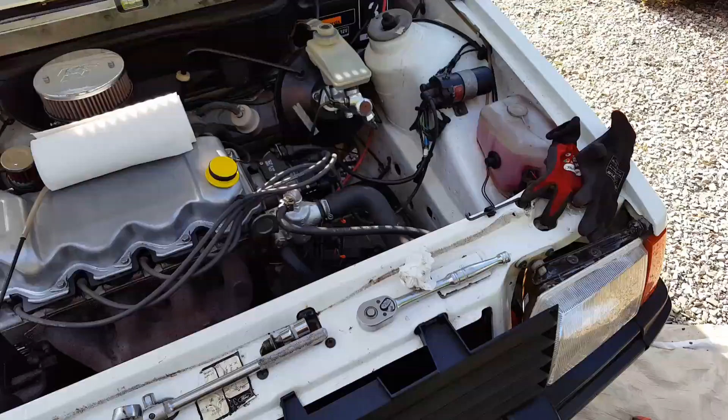Hello, Spring here. Right, going to change the gearbox oil on the Escort 1.6 CVH 1984 5-speed manual.

Just went out for a little day out, me and Tracy. Went up to Driffield Way, Bainton, up in Yorkshire, North Yorkshire. Drove beautifully, 105 miles round trip, absolutely spot on. She ran exceptionally well on the motorway. She likes 70, 80 miles an hour. Yeah, absolutely beautiful. Used hardly any fuel.

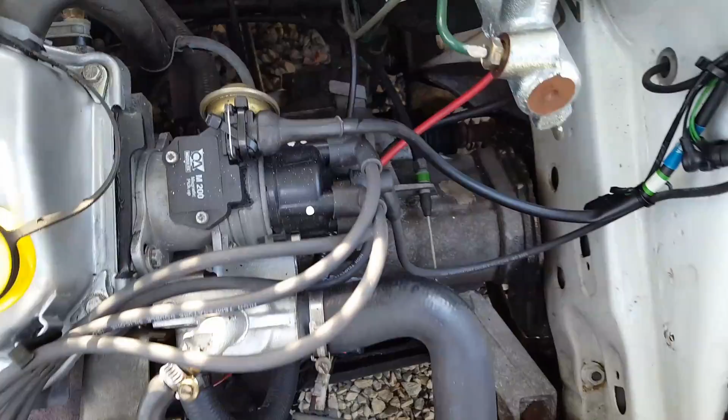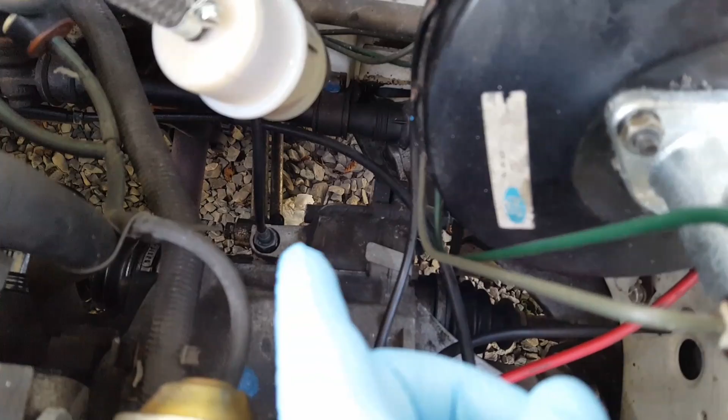Fantastic. So when I got back, because it's the longest trip she's done in a day, I thought I'd just have a little check round, look for any extra leaks. I found a little leak there on the speedo input to the gearbox, or output from the gearbox. Now that's been seeping since I got the car. For some strange reason I never actually checked it. I just assumed that the seal had gone. So it was seeping a tiny bit. And when I got back I checked it, and lo and behold, the collar was actually loose.

So I spun it back out, pulled out the outer cable, gave it a good clean up, put it back in. And what you have to do with this, I don't know if you can see from there, but on the cable itself, there's a squared off section. If you grip that with some pliers or a mole grip, and then you spin, the only thing I found to go on there was a 3/4 AF spanner, which was near enough. So you hold the centre steady and then do that up, and it's gone down nice and tight.

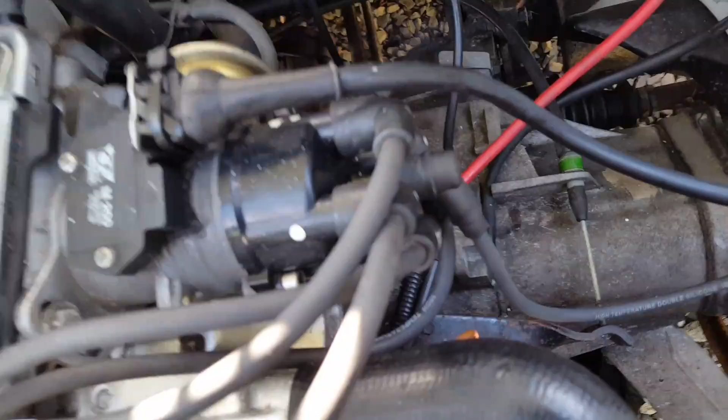So I've cleaned that up. We'll see if it actually leaks in the future. But yeah, I hadn't even thought to check to see if it was done up tight. I've had this a year now. And also the last person who tried to put it in hadn't held the cable part with pliers, because the whole thing was wound up. When I released that, it spun about 4 times back. So it's now as it should be. There goes the spanner in the drain box.

I found a tiny leak, which I can't show you from here, but there's 3 screws here that keep the 2 halves of the distributor together, and on the bottom screw there was just a tiny occasional drip, and it dripped onto the gearbox. So even though I changed this distributor, and I changed these bolts because they were a bit naff. This is a new distributor, but it's used, but it was newer than what came off. This is the Lucas modern conversion.

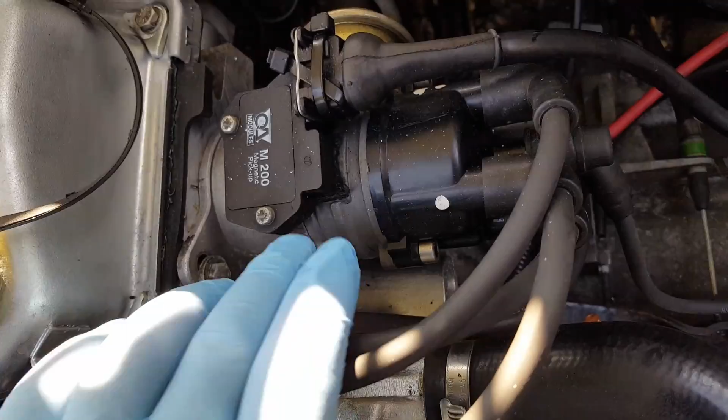Anyway, even though I went through it all, I obviously didn't do these 3 screws up nice and tight. I must have just assumed that because they held the 2 halves together and no one was going in there, that they'd be tight. So I did a little crank on all 3 of those, and that leak has stopped now, although it's not running. So we'll keep an eye on that.

They didn't feel like they wanted to really crank too much, so if it actually leaks again next time, I'll pull the distributor off, and I'll change the 3 of them. I shall just put little Allen bolts in with the nylock nut on the back. There's plenty of room. I shall do what I did to these, except these I didn't put a nut on.

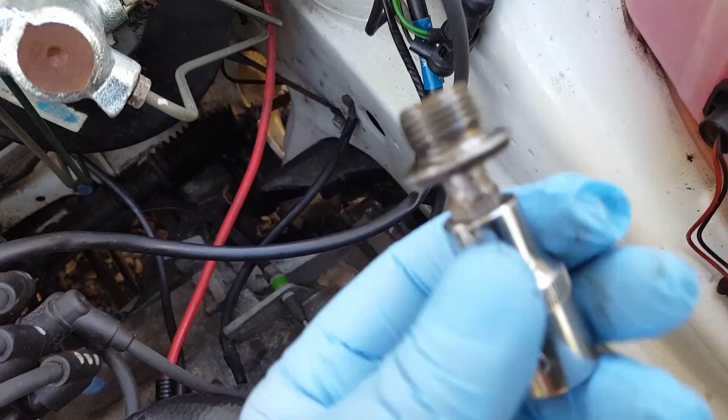So that's that. Anyway, then while I was looking at the gearbox, I thought, I haven't actually touched the gearbox oil in this since I've had it, and I've changed everything else, so it would make sense to check it. So I've been in the manual. That's where the filler plug was that I've taken out, which is on this particular box, a number 50 Torx.

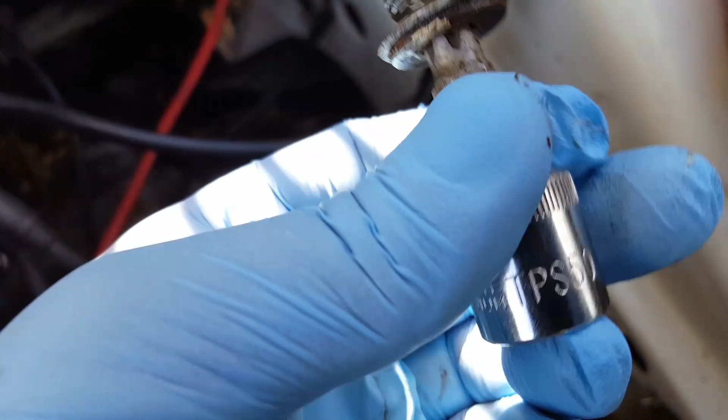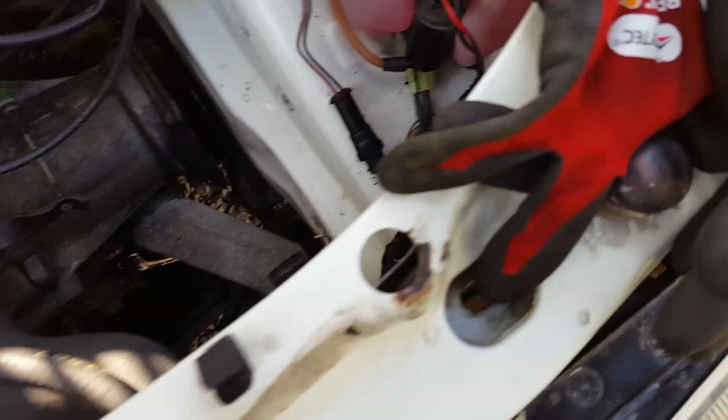Depending on the designation of the gearbox, the suffix letter on it, it can be an Allen key one, it can be a Torx one, all manner of things, and they don't tell you what size. So I managed to get that out. It wasn't too badly seized in. Just used one of these and that big spanner on the end of it for leverage, and it just cracked. Anyway, now in the manual, let's go down bottom, I'll show you. In the manual it says, like a lot of cars, particularly modern cars, bear with me while I get underneath.

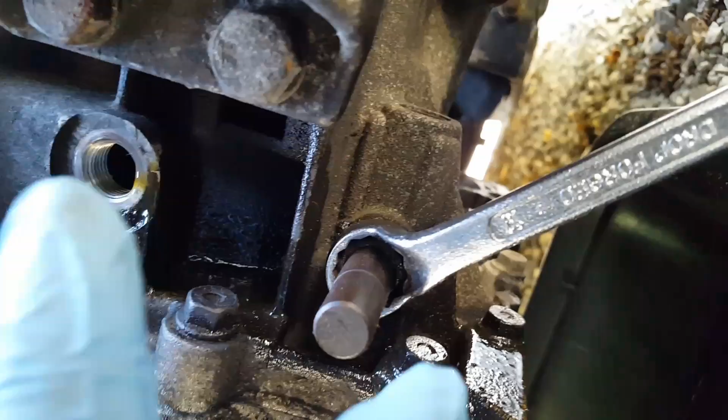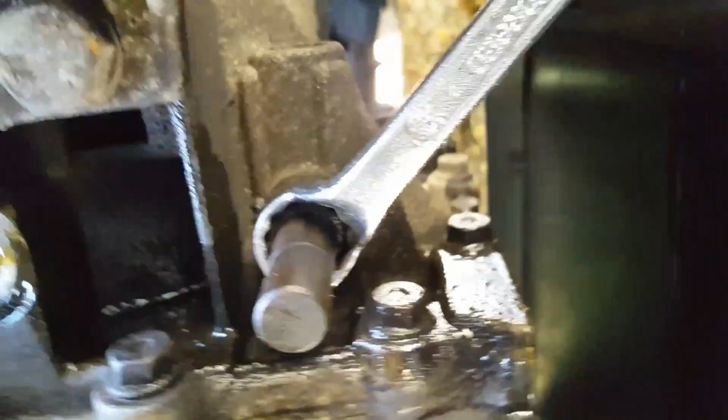All that oil, by the way, is just what pissed out of here because it was red hot when I undid it, and obviously the oil had expanded past the filler, so I'm just catching that. Anyway, in the manual it says don't change the gearbox oil, you don't need to, it's not a maintenance bit, just periodically check the level and top it up if necessary.

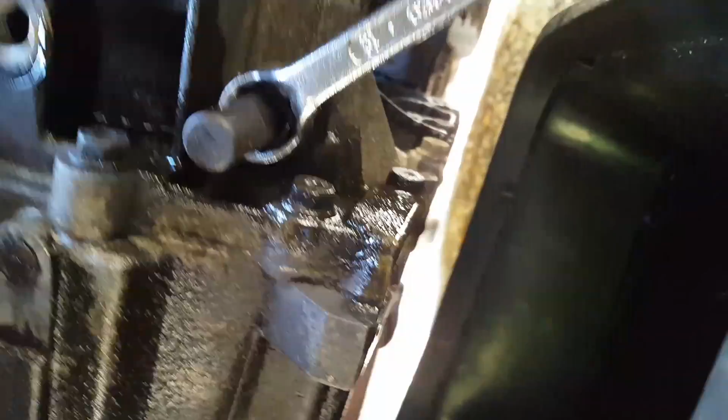Well, that's alright, but when your car's 33 years old, it can get a little bit stinky. So this stuff is rank and definitely due a change. So underneath in the manual where it says don't change the gearbox oil, just top it up, it then has a little paragraph that says if you do need to change the oil, i.e.

If you're taking a box out and you need to get inside there and you need to drain it, you need to take this one out, which I forget what it's called. It's something like a neutral lock. So in here apparently there's a spring and a pin, and I think it locks it in neutral if you're taking the box out. To be honest, I didn't even bother reading up on that, so it just says undo this, there'll be a spring in there and a pin, watch out. So I haven't undone this yet, and that's how you drain it, and then you can refill it.

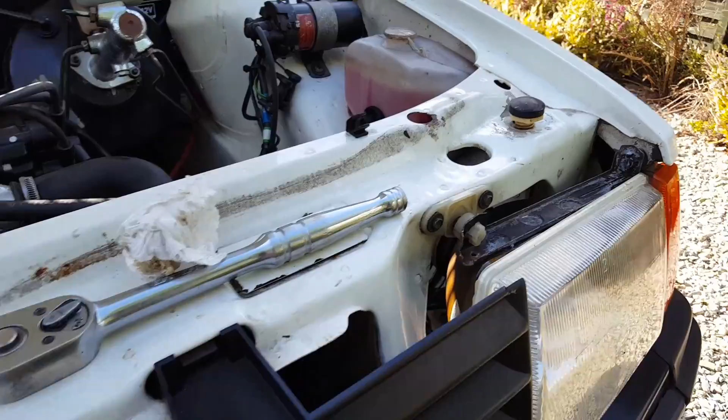So although don't change the oil, if you do have to change the oil, take that out, drain it, and then to measure the new oil, depending on where you look. Oh no, where's it gone? I've lost it. Right, capacity, anything between 2.8 and 3.1 litres, but it says, I've lost it, I made a tool to measure it and it's gone. I might have to pause a minute. Basically it said,

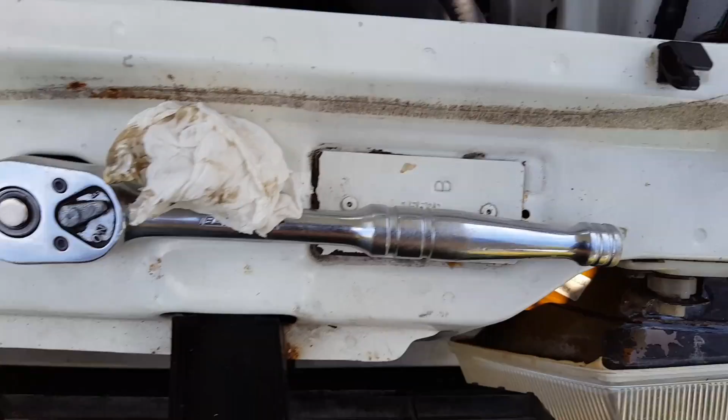depending on the gearbox, 5mm down from the filler hole. So it says bend yourself a bit of metal and mark off 5mm underneath the bottom of the hole. So I took an Allen key, chopped the end off it and put a mark 5mm down, and I appear to have dropped that somewhere. So I'm going to pause and find it. Yeah, as I thought, it was in the pan of oil.

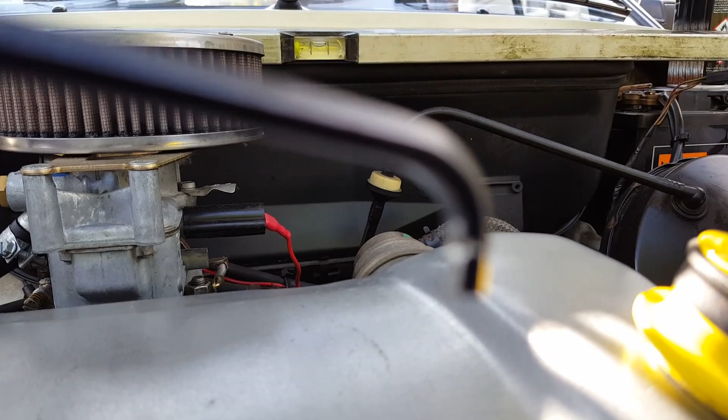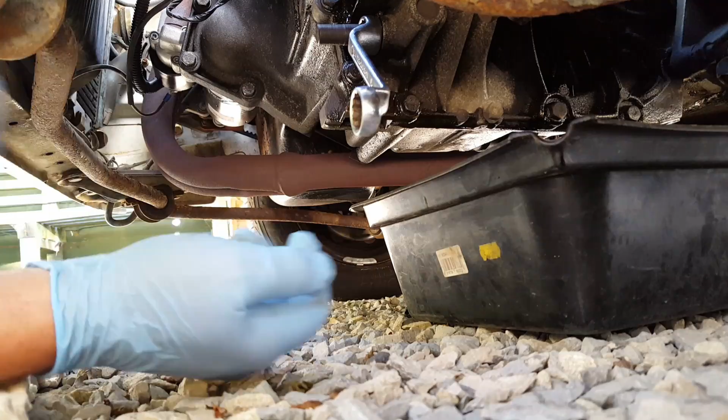Right, please focus. Basically, I took an Allen key, chopped the end off, and I've put a little notch in the end, like a dipstick, and that is 5mm from the flat, this flat part, not from the curve on the corner. Oh well, anyway, I want to get this bottom thing out and let it drain.

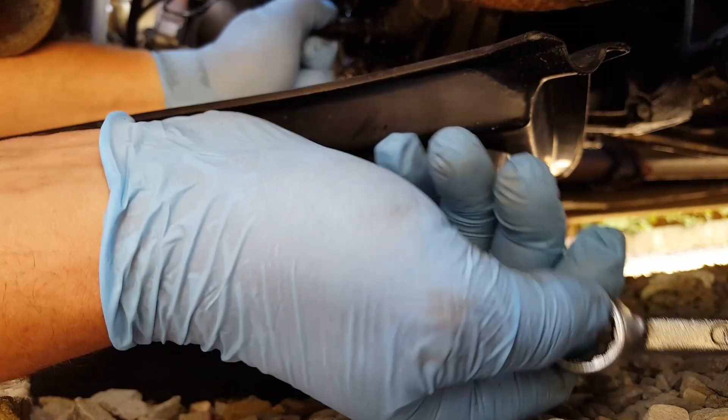Okay, well, I've just literally given that a little tap with the edge of the hammer and that's gone free. So we'll see how it goes. I'm sorry the drain bowl's in your way, but needs must. I'm trying to do it so you can see what I'm actually doing rather than me just doing it and then showing you afterwards. And apparently there's a spring and a clip or something, so this should be quite interesting. It's a 19mm, by the way.

Oh, and also it says when you're doing this, make sure the car's level. Well, I've got a big 1 metre spirit level and I've put it across the bonnet slam panel from 2 identical points. It's level that way, and I put it across the door sill and it's level that way, or near as damn it.

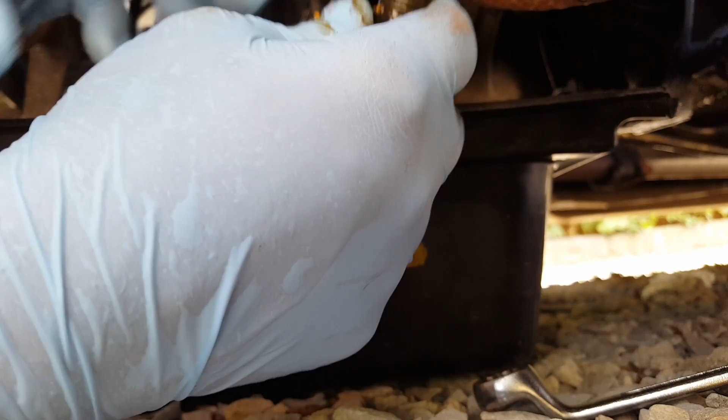Right, I don't know where the pin is, but the spring is on the end of this. Well, no, it's not. Maybe it's still in there. I'm gonna have to watch out for that. Whoop, there's the pin. Right, that's spring loaded. So, yeah, that is like a cam chain tensioner of sorts. So there's the pin. It comes out and the spring's inside there. I can feel it. So very interesting. Somehow that locks it in neutral.

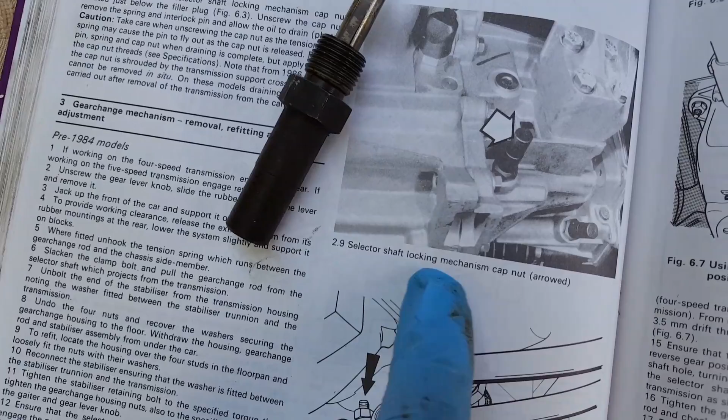I think I might have lied, depending on how well I didn't read the next paragraph. So now I'm going to let that drain forever. And shame it's not smelly vision, because that absolutely stinks. That's proper due for changing. Right, I'm going to pause it now and have a cup of tea, coffee, fag.

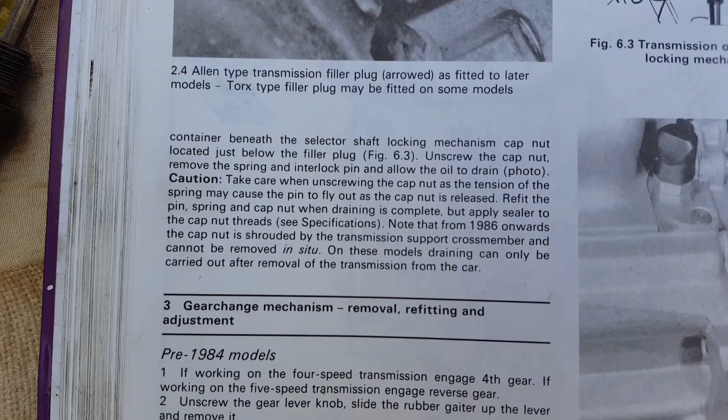Right, that is the selector shaft locking mechanism cap nut. It says just take it out, drain it. And if you want to pause on that, you can find out what it's all about. It says when you put it back in, put some sealant on the threads. So I was going to do that anyway, but it's nice to know that you're supposed to.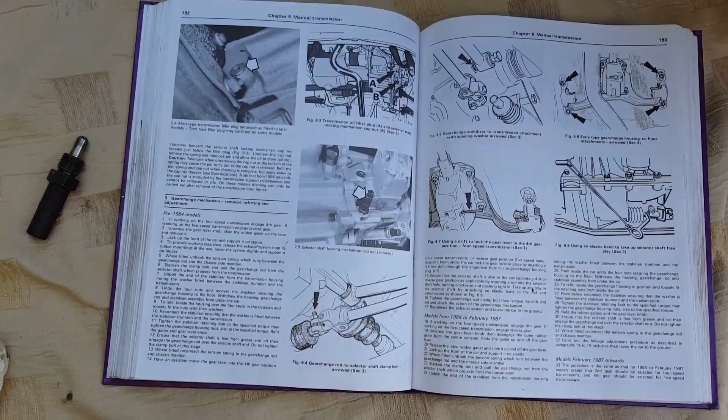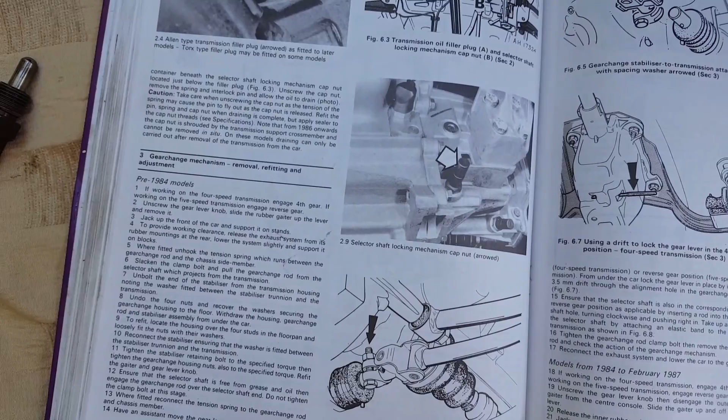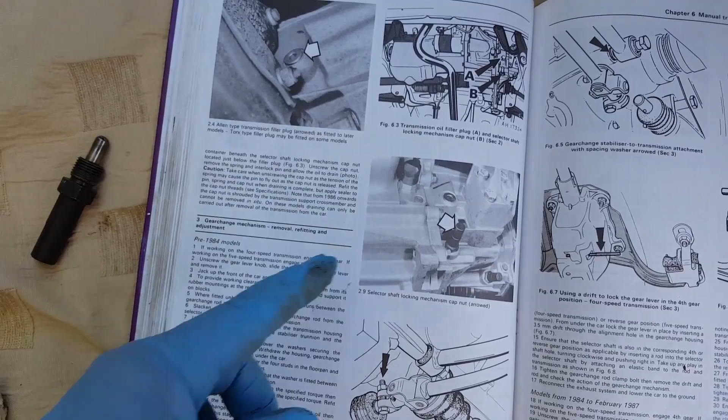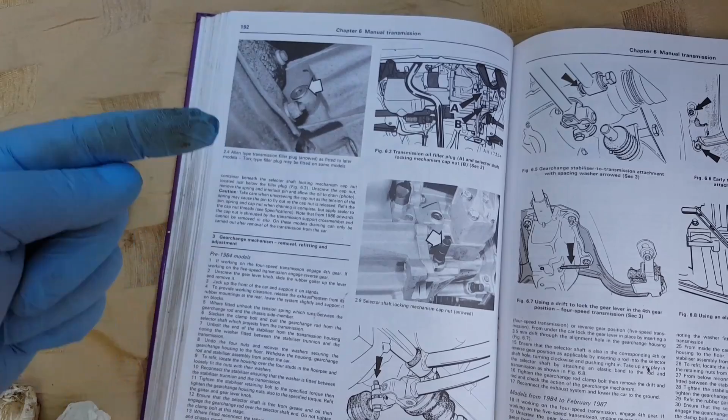Yeah, and with the oil levels, where is it? Oh, it's completely different. The oil levels, depending on what gearbox it is, depending on how many millimeters from the bottom of the drain plug hole it should be. Some of them it's 5mm to 10mm. Some of them it is 2mm to 5mm, depending on the suffix number on your gearbox on the tab on one of the top mounting bolts. Well, I've looked at the tab. In here it says if it's type D it's 5mm min, 10mm max, and if it's type E it's 2 to 5mm. Well, mine says type A.

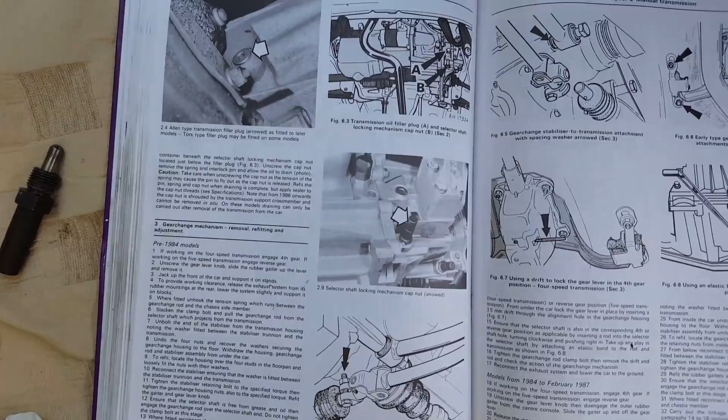So heaven knows. So I've just gone for the 5, because one of them it's 2 to 5mm, the other one it's 5 to 10mm. So I figured it'll either be at the bottom of one or the top of the other, but it'll still be within range. So if I make it 5mm, well, that's how I see it anyway. What do you think? Let me know.

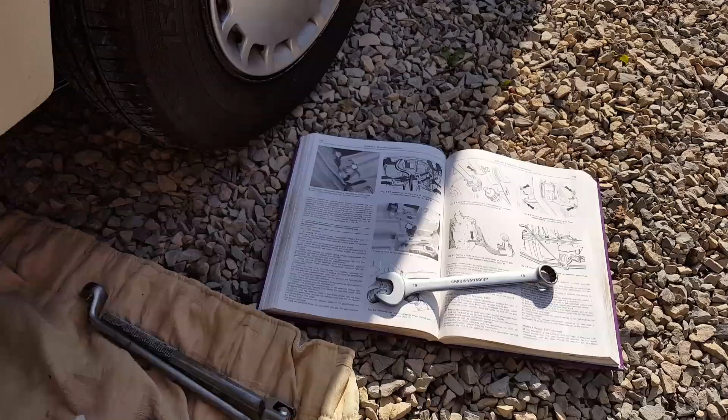I'm sure you will. Okay, right, time for coffee and fags while it drains. Which it is doing.

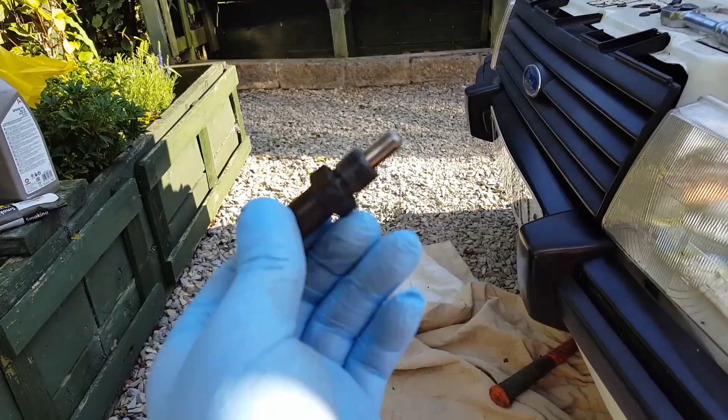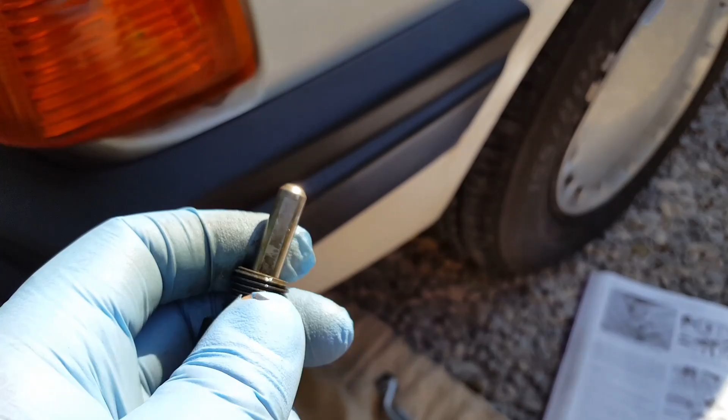Another little note on this. It says if you've got a 1986 onwards model, you can't take that out because there's a support leg bit of the chassis in the way of it. So you can only take that out if you take the gearbox out. So it says in there you can't drain the gearbox if you've got a 1986 onwards. So that's fun. Thank God it's a 1984.

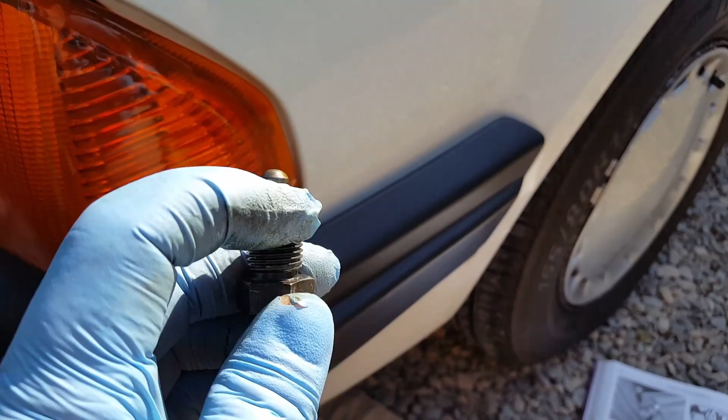And then the other thing is, on inspection, there's a flat on this pin. There's no mention of that flat at all in this manual whatsoever. I'm hoping it doesn't locate on something. I'm hoping, this is me guessing, like when I was pushing that in earlier, all the oil in there was pissing out of where that little flat is. So I'm hoping that flat is just to let oil in to there, to all the slidey spring bit.

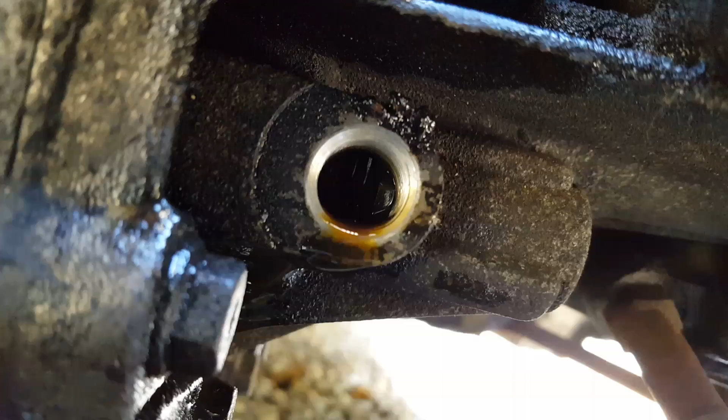But no doubt we'll find out when I put it back together, and if I can't select any gears, somehow we'll have to find out which way round that goes. Great fun, but I'm sure it's just for oil. What do you think? Answers on a postcard, please.

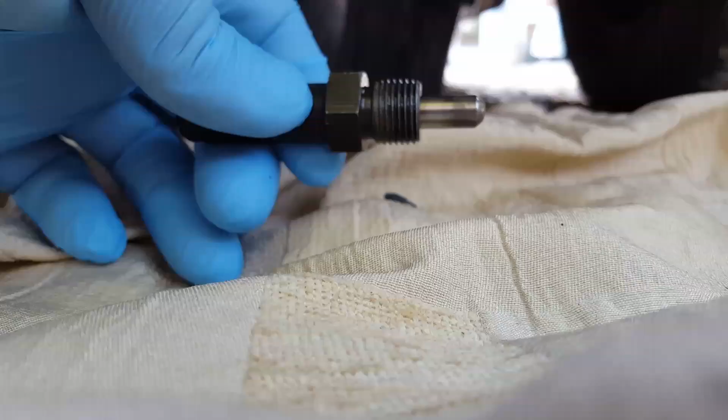Right, I've had a look in there, shone my torch down the hole, and there isn't anything for that little flat to locate in. It's literally the rounded bit of the pin goes into the slotty recess inside the selector rod or whatever it is. So I think I'm safe. And pause.

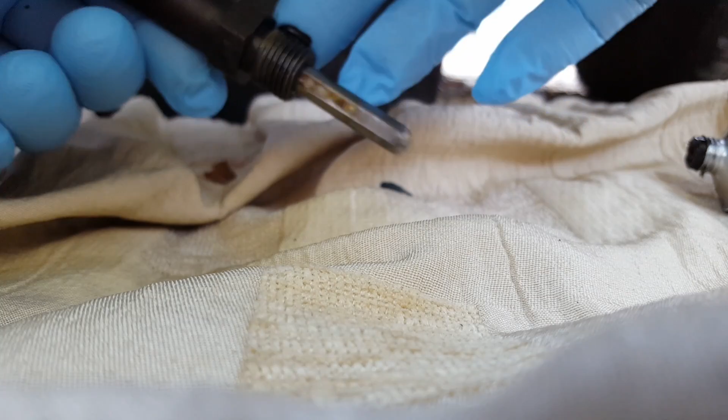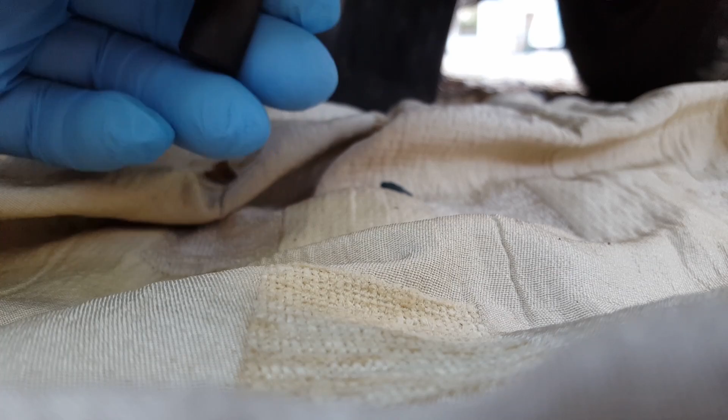Right. The only sealant I possess at the moment is some RTV instant gasket. That'll have to do. I've run out of blue Hylomar. I've got some red, but that's sort of pretty shit. I think that's for drastic seals on water stuff, my experience. So black RTV it is, without dropping the pin. Now I've covered it all in oil. That's obviously what that little flat face is for, because that's just pissed oil out everywhere.

Right. Sorry, you can see. Whee, it's coming out again. That's it. Ton of that round the thread. And I just knocked you over. No, I need a tripod. Let's see if you can see what I can see.

Need an assistant camera person. I'll have to use one of the cats. Luca's always around, so. Right. I can't see what I'm actually doing. I'm looking through the screen on my phone, so that I can let you see what's going on. Right. So there you go. I'm doing it all for you. Doing it badly, all for you, of course. I don't think Martin Scorsese's got any fear of losing his job anytime soon. Just assuming he's still alive. Apologies for that, the Scorsese family, if he's dead.

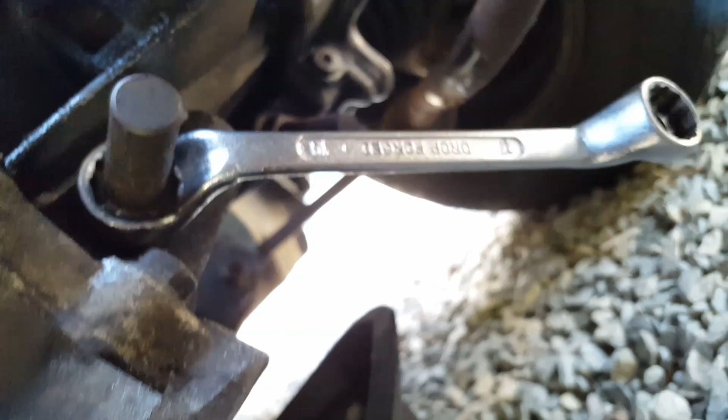Very important to make stupid noises as well, as Alexei Sayle proved in Bambi, the first episode of the second series of The Young Ones. If you're feeling down and you've got no choices, don't frown, turn around and make some stupid noises.

Yeah. Oh, that just sort of goes solid there. So, that's it, full stop. So I'm just going to give that a little tap, because all I did was give it a little tap to come off. That's weird. That's like, that's in. That's probably why they say put some sealant on it. So let me grab the hammer.

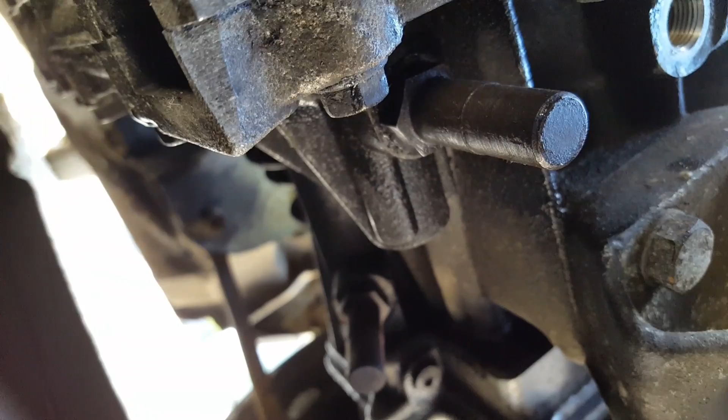Oh, in typical paranoid style. I took it back out because I thought, did I check to see if that rod was in there that's spring loaded, and has it gone in properly and everything? Well, yeah, the rod was in there and the spring, and then I took it out and there was no sealant on the thread whatsoever. So I resealed it, put it back in, and it's just odd. It feels like it just completely bottoms out. So I just gave it 4 little taps with a hammer. Hopefully that's in. There's no torque setting or anything for it.

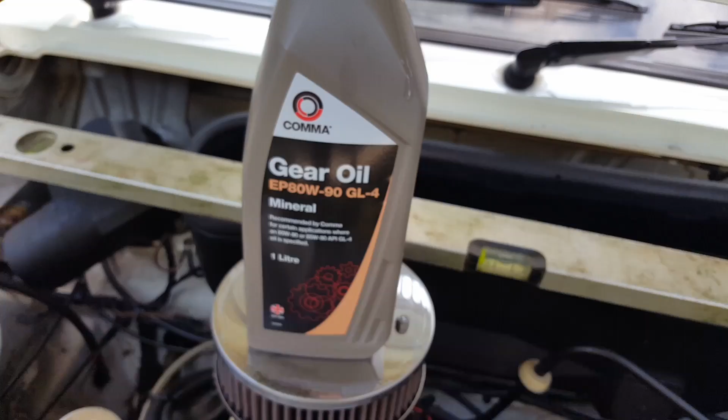So anyway, next conquest, which I'm sure I won't be able to film, is to just keep putting the oil in there. When I get to about 2.5 litres, I shall put it in little bit by little bit, so that I can measure it in my little stick I've made out of an Allen key. So we'll have a look at that. Make sure I have a tripod.

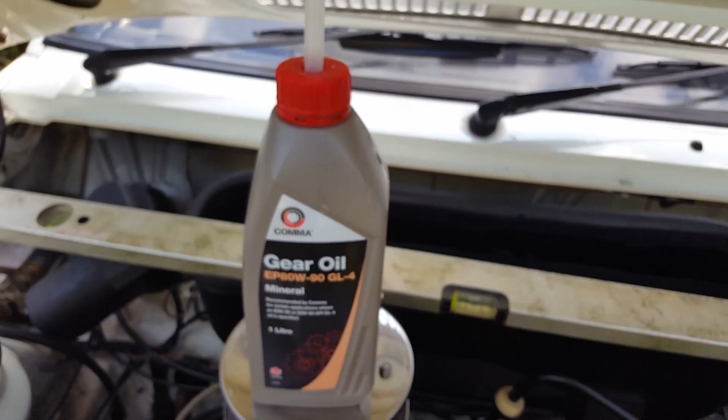Righty, I thought I'd show what I'm doing for the first bit, because I just thought if you've never had to fill up a gearbox or a transfer box or a differential before, it's an enormous amount of fun, because what you get is these bottles with a little spout on it. Normally it's really impossible to get that spout in the hole, or you've got to bend it in half or whatever. But this doesn't look too bad actually, access wise. We'll see. I'll try and film what I'm doing.

I've lost that little blooming Allen key again. I'm sure it's probably in the oil drain pot again. So yeah, when you get them, they look like that. You pull up these tabs, then one-handed pull that out, and that pulls a little spout up. Then you take the top off and squirt her in. There's my little key. Right, sort yourself out, Springy. Here goes. Right. Push the spout in a bit, I think, to start with.

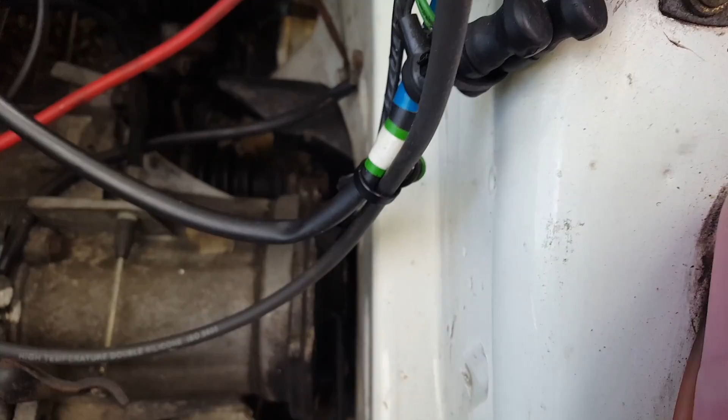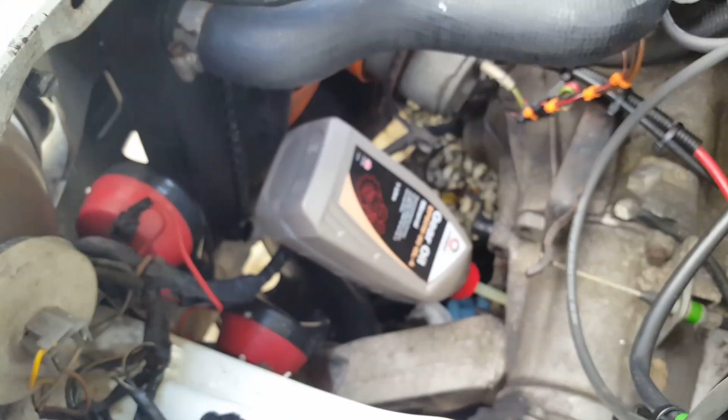Now I've got to try and pull the spout out while it's in there. Right, that's in the hole. Basically, you just got to keep squeezing this until it's empty. So I'm going to do this now off camera because I've got to get best part of 3 bottles in. I'm going to put 2.5 bottles in, so it's 2.5 litres, and the actual measurement is somewhere between 2.8 and 3.1 litres. So if I get 2.5 in, then I use my little device to measure the level, and then I'll pop the plug back in. So this is probably going to take me 10-20 minutes to get this in, so I'll see you in a bit.

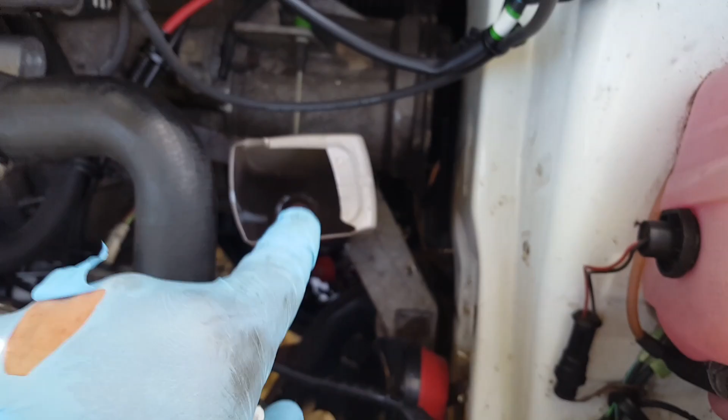Well, yeah, this stuff takes forever to get in. You're pushing it and then there's a vacuum in it, so I just had a little thought. I'm going to bang a hole in the bottom of that and see if it will go any easier. So see what happens. Well, started cutting a hole in it and I thought, yeah, just make it into a funnel. As soon as I got a hole in that end, like the old carnation milk, you get your can, put a hole in it, nothing happens. Put 2 holes in it, it pisses out. Yeah, basic physics, Springthorpe.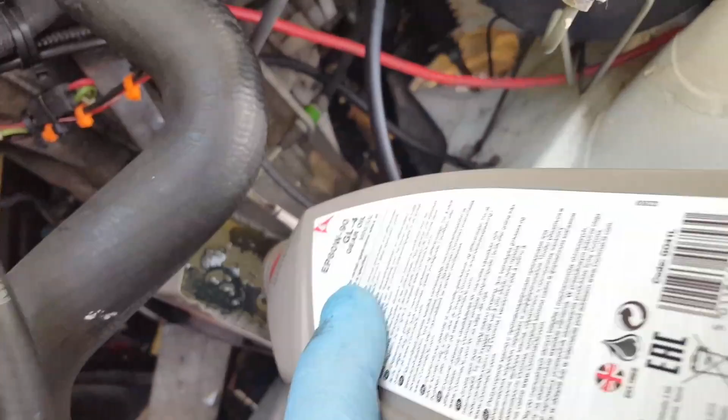So now that's gone in, I might have to put an extra funnel on this. I have a funnel to pour the rest in, and that bit of electrical tape will probably let go and it'll go everywhere. See what's happening. Yep, it's going down of its own accord. Gravity will pull you through.

Thanks for the quote, Martin Fry of ABC. So that'll be the 2nd litre. The Pinto, the 2 litre.

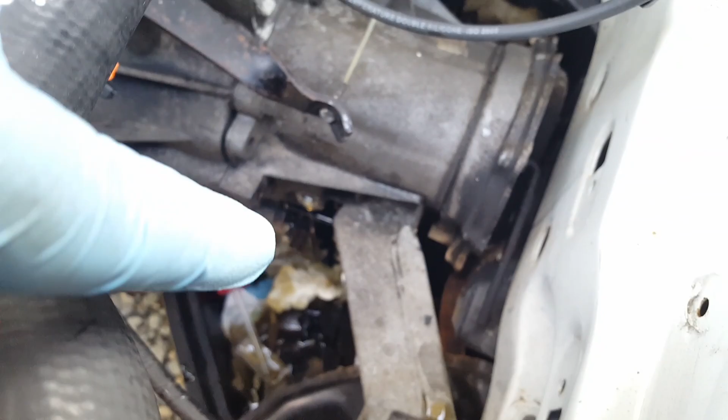Right, I shall wait till that disappears. Right, well, I guess undoing that bottom thing that it told you to drain from does not get all of the oil out of the gearbox, because I got less than 2.5 litres in and, as you can see, it's just pissing out now. So I'm going to have to wait until that stops running, and that level, like you do on a diff, that level is actually 5mm higher than it says it should be. So, oh well, that's interesting. I'm not sure how I'm going to get a little bit out, but I'm sure I'll devise a way.

Actually, I've got some syringes with little tubes, and I've even got one of them vacuum pumps you stick down a dipstick to empty your oil without doing your sump plug. I've got one of them, I haven't used yet, so anyway, I'll probably just get a syringe and syringe some out until that level is correct on my little marker stick. Yeah, so there's probably half a litre still in the bottom of the gearbox of the old stuff. So a little bit of duff information in the manual saying take out that bottom thing, but I've just gone with what they said.

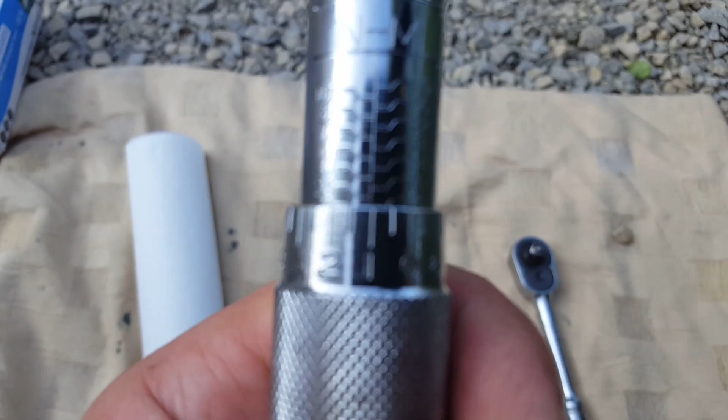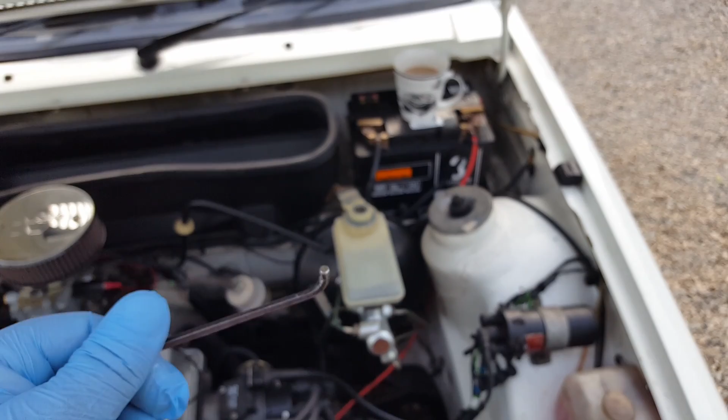Alright, well that is near enough on the little mark there. I'll stick that back in, do it up. 27 Newton meters. Button it up, clean it up, get inside, make sure I've still got all my gears, and that'll be it. Oh, just before I run out of battery in my phone. Yeah, all gears fine. All good. That's probably my imagination, but it actually feels a lot slicker going into reverse than it did. So, who knows? We'll take it out for a test drive tomorrow.

That's it. I'm done. Battery's pretty much run out. Clear up all this mess. Seem to have gone a bit fuzzy. I think that's because the battery's about to die.